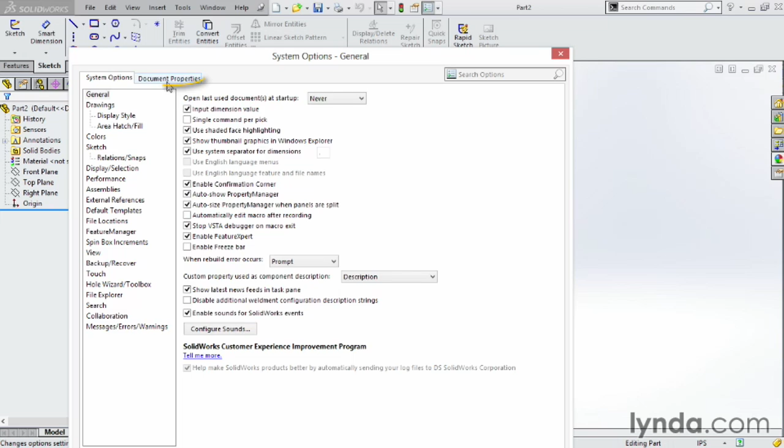The first few things we might want to be adjusting are maybe the units. So let's go up here to Options. Let's come over here to Document Properties, go over to Units, and take a look. I can change from millimeter to inches or any other combination between the two. I can adjust how many decimal points I can see in my part.

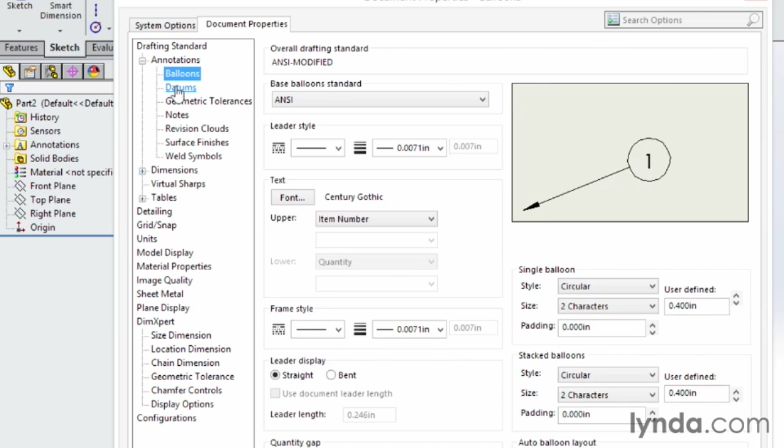When I'm happy with that, I can also go ahead and take a look at annotations, how things are going to look on the screen. I can look at the drafting standard I'm going to be using. I can modify balloons, datums, any of these things here, change the way angles are presented. I can change many different things as far as the detailing or setting up of these functions inside of SolidWorks. Under my system settings, I can make any of these changes. Once you're happy with those, go ahead, click on OK, and now that's saved out.

How about the background? I can take a look at the background here. By default, I've got the 3-point faded background turned on. I'm going to change this over to this rooftop background. Bring a little color in the back. It's okay.

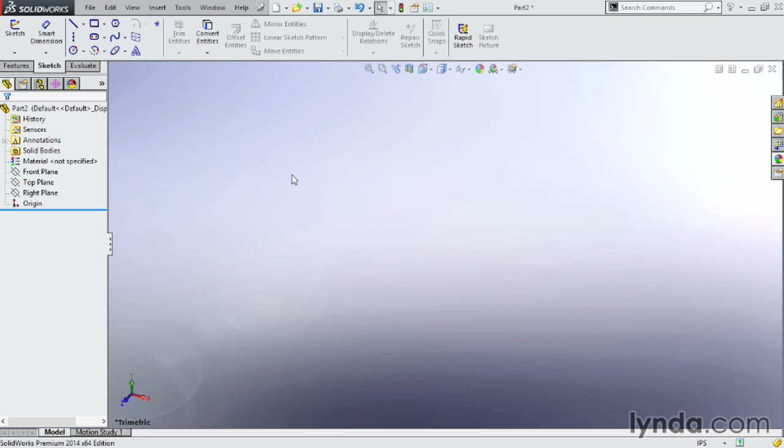How about the planes? Maybe I use the top plane quite a bit. So I can click on that plane. I go ahead and show that plane so it's there. And maybe the origin. Maybe I want to show that origin as well. And if you don't see it there, just go ahead and click on it and then make sure you go under View and make sure you're showing origins. That's a good starting point.

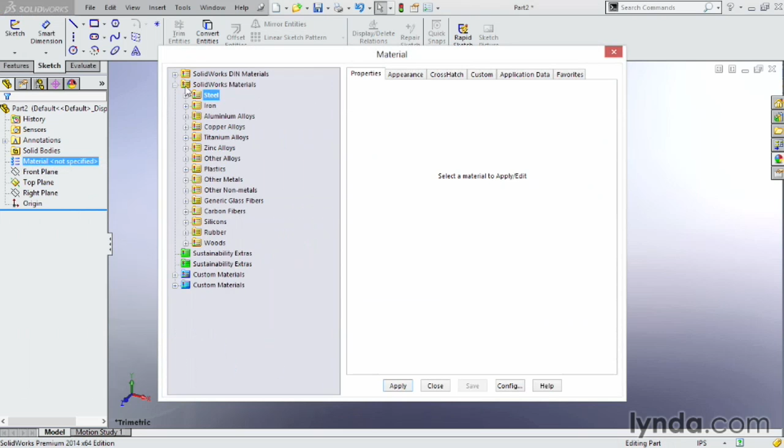And then maybe we're using a lot of aluminum parts and we want to predefine the material before we get started on building the part. So I can click on Material. I can right click on it. I can say Edit Material. I'm going to jump down to aluminum alloys. In this case here, I'm going to choose 6061 T6. There it is. Go ahead and click on Apply.

And if I want to, I can also come over here to Favorites. And if I'm going to use that one quite a bit, I can go ahead and add it to Favorites. Go ahead and click on Close. Now we have a part that's looking pretty good, and this is a starting point of where I'd like to start when I'm building other parts.

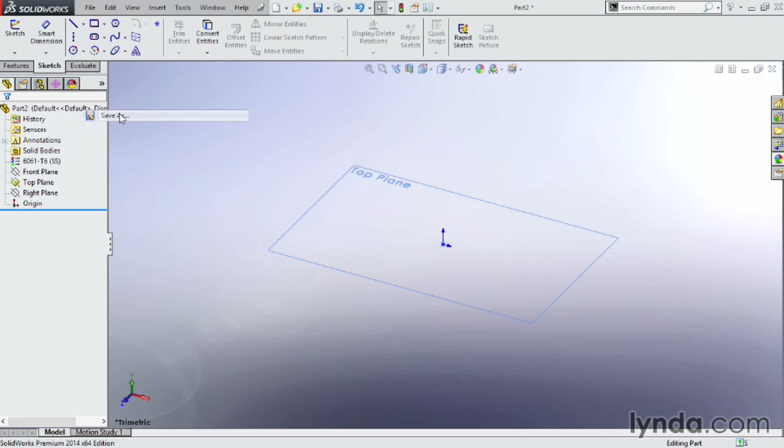Now I'm ready to save this out to the file system. So I'm going to go up to File, click on Save As. And by default, it's trying to save it as a regular part. We really don't want a regular part here. We want this to be a part template. So I'm going to click on the drop-down and choose Part Template. Notice I've got that part PRTDOT originally in there that we started from, but I want to actually save it out as a different template. So I'm going to call this one New Part.

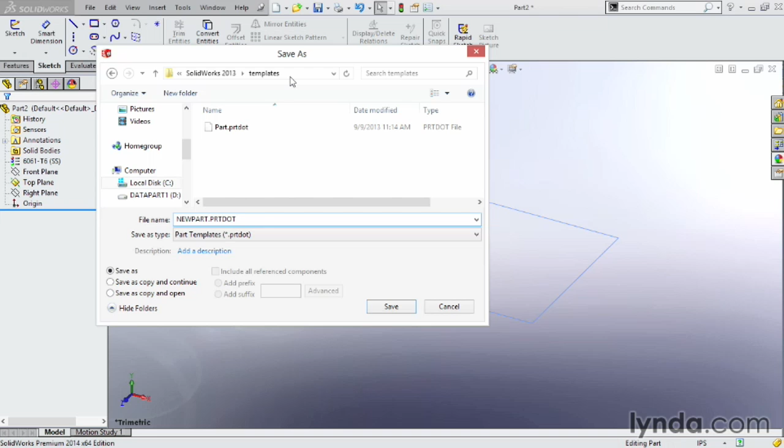And that's going to be saved in SolidWorks 2013 templates, or you can update it to 2014 depending on which file you're using. A lot of times when you install a newer version of SolidWorks, it continues to use the older folder. So we have 2013 as well as 2014 installed on this machine, and it's using the 2013 folder right now because we upgraded the software from that and it's not overriding. So either way you have it set up is not a big deal. When you're happy with it, go ahead and click OK, click on Save, and there it is.

Now I can close this down, come back up to New, and notice there's my new part template right there. If I click on it, click on OK, it opens it up. Or if I want to, I can click on New, go back to the original template, open that up, and notice I don't have any of those changes. So you can have templates in all types of different shapes and sizes. You can have some for inches, some for metric, some with different backgrounds, different materials.

In fact, you can even have the beginning stages of a part designed. Maybe you have a bracket you always use. You can actually design the bracket and save that out as a starting point for future designs. Also, if you have part templates you're going to want to save on a network share folder or a server so that everybody in your company can share the same templates, you might want to save those on a remote computer. And then point your SolidWorks version to go and look for that folder.

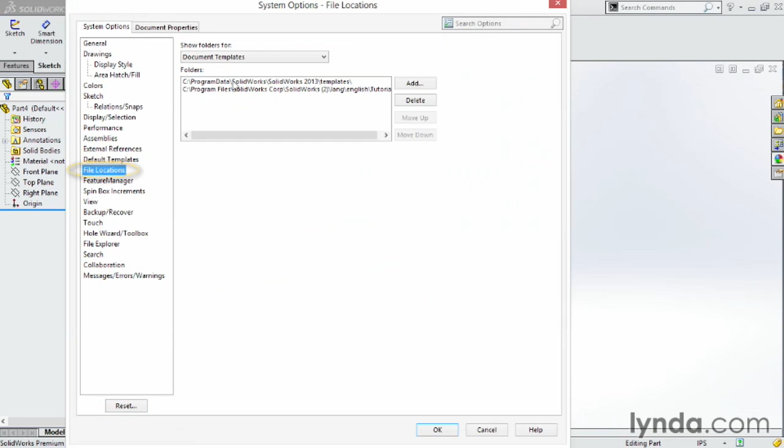To do so, go up here to Options, come over here to File Locations. Under Document Templates, go ahead and click on Add, find the path, and then click OK, and it'll add it to your list of search locations for those new templates, and it'll show up as a new tab on the top of that new document dialog box.

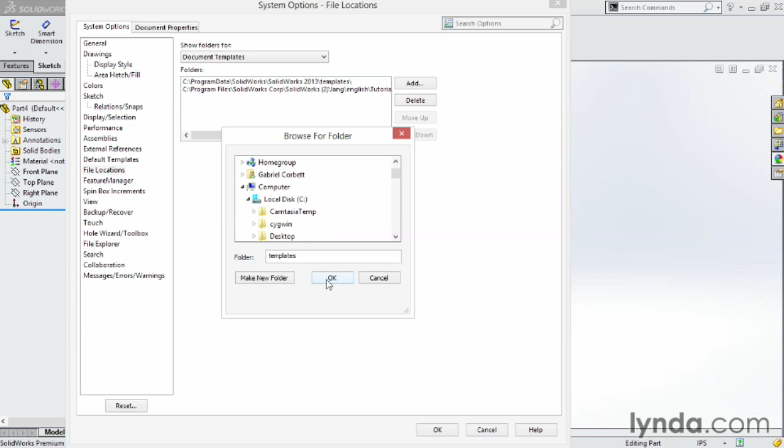Creating a template configured with all the options you want to use in a design will save you time and help you focus on the design versus constantly having to modify system options on a part-by-part basis. Create templates for all of your most common part types.